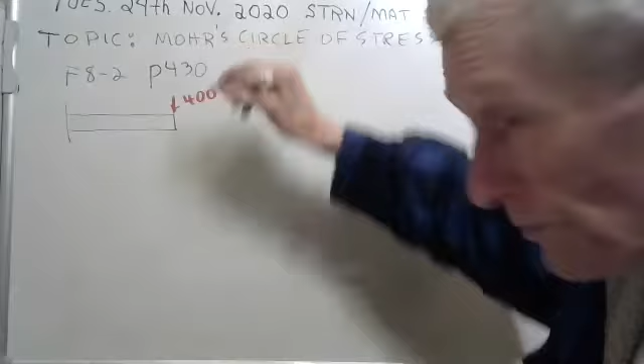I think we started on this the other day, but we ran out of time. And we have a 400 kilonewton force going down here, I'll put that in red. 400 kilonewton force. And they want us to section it right here, section AA, 0.5 meters.

Well, why don't we just look at this section separately? I'll move it over here someplace, and we can look at it. I've removed that section there, and here's your 400 kilonewtons. Can you see that you'll have to have a 400 kilonewtons? Actually, it's a shear force, isn't it, going up, because we know the sum of the forces have to be 0 in this class.

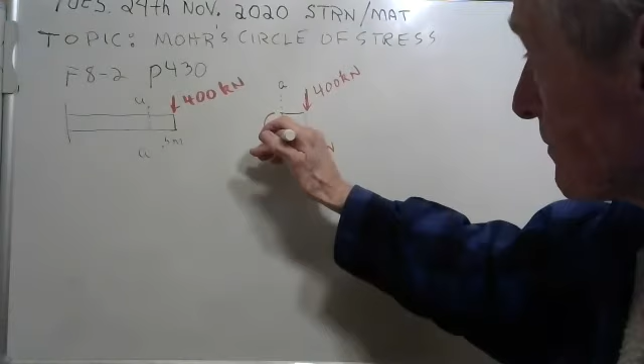But now we've got another problem: this thing will start spinning clockwise, so you've got to have a counterclockwise bending moment. You can figure out what it is. If this distance is 0.5 meters, take 0.5 meters times 400 kilonewtons, and what you'll get is 200 kilonewton meter bending moment, counterclockwise.

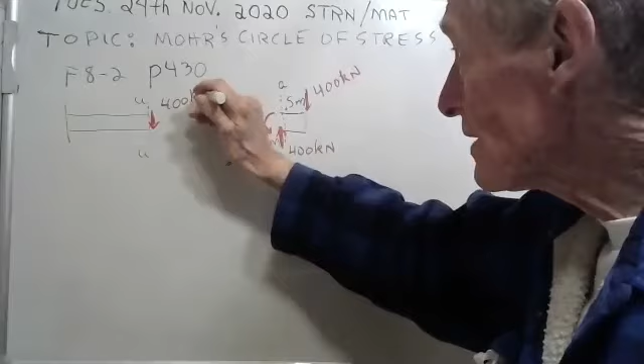But we really like to look at left-hand members. So let's go back over here, and let me erase that and put the forces on section AA on my left-hand member. See that 400 going up on the right-hand member? Well, there has to be a 400 going down on the left-hand member. Newton's third law says so - for every action, there's an equal and opposite reaction.

So you know where that 400 kilonewtons coming from on that right-hand member? It's coming from the left-hand member. And where is this 400 kilonewton shear force on the left-hand member coming from? Well, it's coming from the right-hand member. Equal and opposite.

You see that counterclockwise bending moment on the right-hand member? Well, there's going to be a clockwise bending moment of 200 kilonewton meters on the left-hand member.

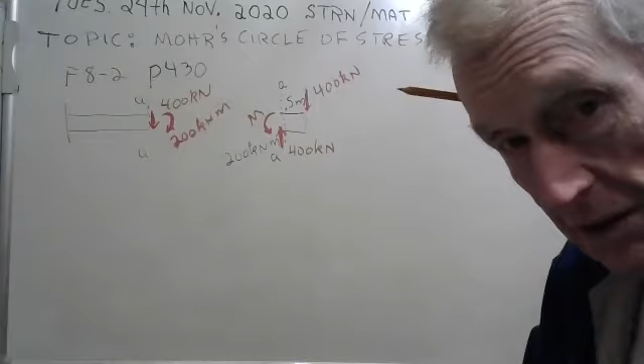Newton's third law. Here I'll demonstrate. I've got my hands here, and I'm going to clap them. Are you ready? Here we go. Ready, get set. Ow, that hurt. Both hands hurt. This hand stings because this hand hit it, and this hand stings because that hand hit it. They're equal and opposite forces, Newton's third law.

I'm sure you knew all that. All right, now let's figure out, they want us to find the stresses.

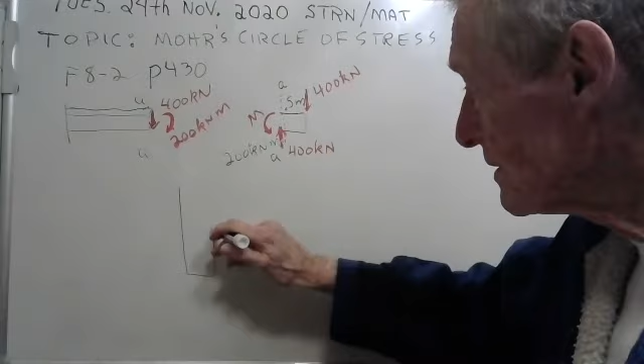Now this is a beam, and it's a rectangular beam. I'll try to draw it here. Not very good at drawing this stuff. There we go, let me draw it larger. They said it's 100 by 300 millimeters. There's 100, 200, that's about right, there's 100, 100, 200, there we go. I could have measured it and been right on the money. See, this is your cross section, I'll draw it there so you can see it.

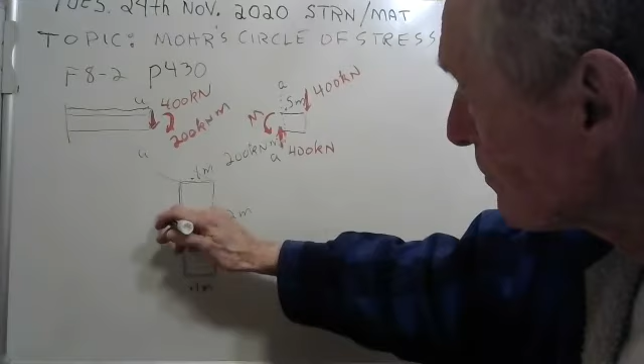They want us to find the stresses right there. This distance is 0.1 meter, 0.1 meter. From here to here is 0.2 meters, 0.1 meter. From here to here is 0.2 meters, and from there to there is 0.1 meter. This is all on page 430.

And they want the stresses right there. They call it position A, point A on the cross section. They want the stresses there. Well, we have the equations, we know how they go. This one goes like this. That's our flexure formula.

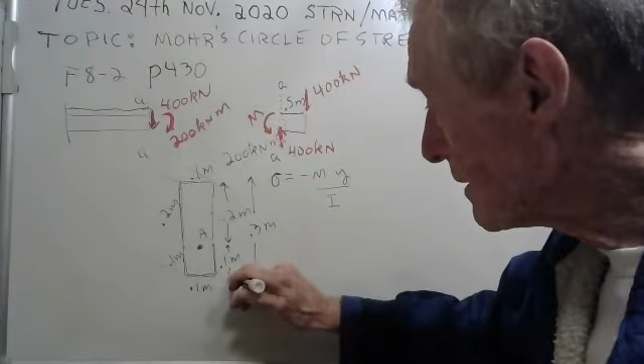Mr. Griffin? Yes. I think instead of that 0.2 meter, it's 0.3 meter. Well, Mohammed, it's 0.2 meters from here to here, but you're right, it's 0.3 meters from the very bottom to the very top. Are you okay now, Mohammed? Yeah, I got it now. 0.1 meter to here, 0.2 meters to there, a total of 0.3 meters. Okay, I got it. Thank you for speaking up, but unfortunately you don't get a thank you point this time. Oh no, I was actually confused, that's why I asked you. Keep trying for those thank you points. Okay, very good.

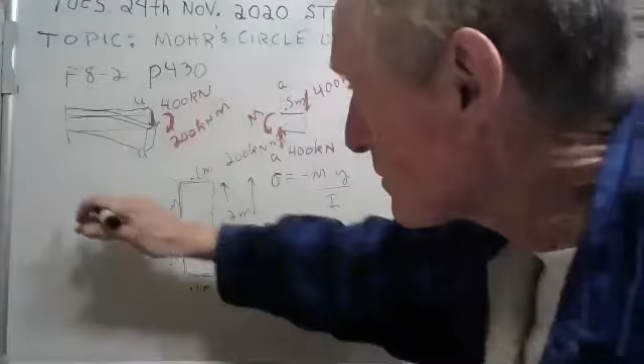Okay, now this is the flexure formula. This is going to turn out to be compression. Now the reason is because of this external force here, this beam bends down. I'll kind of fake it here, but I'm exaggerating. You understand? The beam, it's not going to bend down that much, but it will bend down.

Now, we're used to having beams that bend like that, remember? And the beams we've been studying, again I'm exaggerating, have compression on the top and tension on the bottom. But now this beam here is going to have tension on the top and compression on the bottom. Are you okay with that? So see, everything below the centroid of this beam will be compression. So this normal stress we're talking about, it's going to be going that way, it's going to be pushing. See, compression pushes.

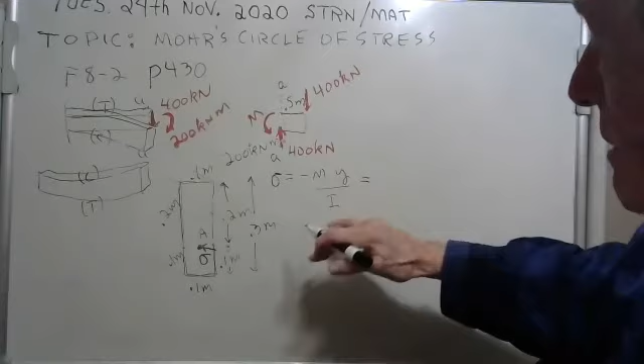Okay, well, here we can get the amount. First, though, I need this moment of inertia. And for a rectangle, we all know what that is. It's 1/12 the base times the height cubed. Okay, go ahead and get that for me, and I'll ask one of you what you got in just a minute.

Okay, I think I got the moment of inertia, but let me ask my students here. We'll pick on Samuel. Unmute and say hello, please. Good morning. What'd you get for this moment of inertia for this rectangular beam here, Samuel? I got 2.25 times 10 to the negative 4 meters to the fourth. Good going, that's what I got.

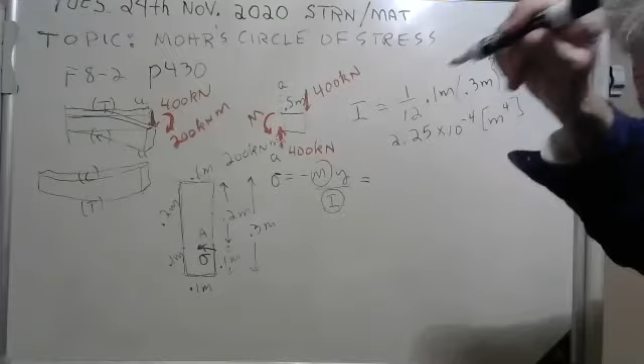Okay, now look at here. We know the moment of inertia, we know the bending moment, it's 200 kilonewton meters. Now, y, that's always the distance from the centroid. Here's the centroid in the middle, right? And that distance there is 0.05.

So here's my numbers. I've got 2.25 times 10 to the minus fourth. I've got 0.05. No, I put that in the wrong place, let me get this right now. I've got 200 kilonewton meters, and this in the denominator is 2.25, 10 to the minus fourth. Yeah, I think that's right.

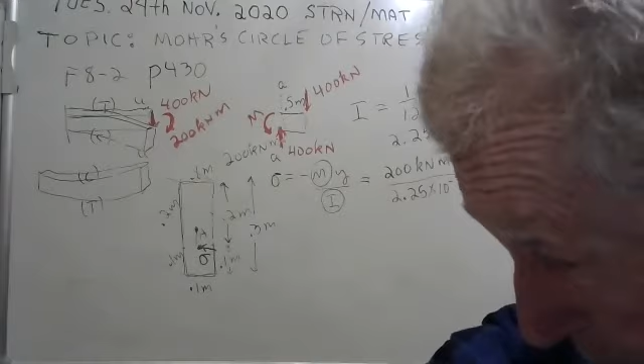Okay, and we know it's compression. See, that's what the minus... well, that minus doesn't work good this time because the y is minus, really, and so you have a minus minus, that makes a plus. But that only applies to these kind of beams like this, that gives you tension on the bottom of the beam. Well, we don't have tension on the bottom, we have compression. So that minus, just don't worry about it, okay? That's for a typical beam, not a cantilever beam.

All right, do that, I'm going to do it, you tell me what you get. Here goes.

Now I got an answer. I got 44.4 megapascals. If you got that, say uh-huh. I need another uh-huh. I got it. I need one more. That's what I got. I think we did good on that.

Now let's get the shear stress. See, I needed to mark the shear on here. We know what the shear is. It's 400 kilonewtons. That's the shear.

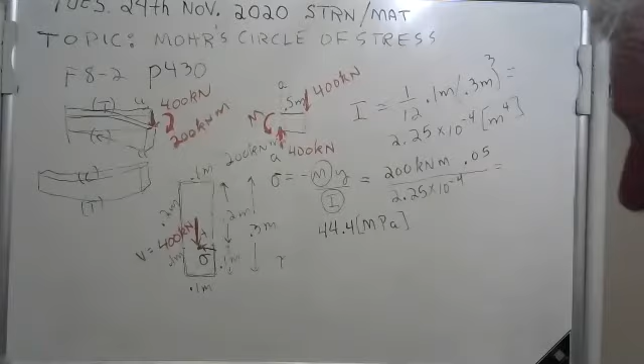Now the bending moment's kind of hard to put on there. The book likes to draw that little squiggle kind of clockwise like that. A lot of times I'll do a bending moment with a double arrowhead like that. But see, the bending moment is 200 kilonewton meters. Okay, but now let's do the shear stress.

Here we go. Shear stress is equal to, now V is that's the 400 kilonewtons. And we got to figure out what the Q thing is. Now I, that's the 2.25 times 10 to the minus 4 meters to the fourth. T, that's just the thickness, it's 0.1 meters.

If we could only figure out this value for Q, we could get the shear stress. Remember, stress is what this class is all about. All right, well, let's see if I can make some room up here. We'll figure what this Q is. Need some room there to do it.

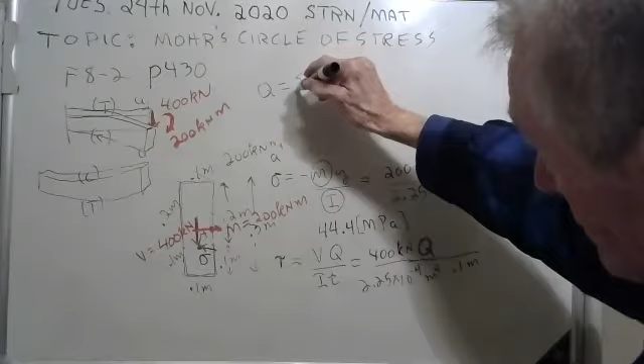Remember what Q is. It's the sum of the YA is what it amounts to. Okay, and there's a method for finding it. What you do is, if you want the shear stress at this location, you draw a line through there. There, I drew a line. And then what you do is you color the stuff above the line.

Now we could do that. Here, I'll color it. I'm going to color all this stuff above the line. I don't know if this shows up on your page there. There we go. I colored all that. And then what you do is you take that area, which is, well, the area is 0.1 times 0.2. But see this Y here, what that is, that's the distance from the centroid of the whole thing, which is right here, to the center of this area, which is right here.

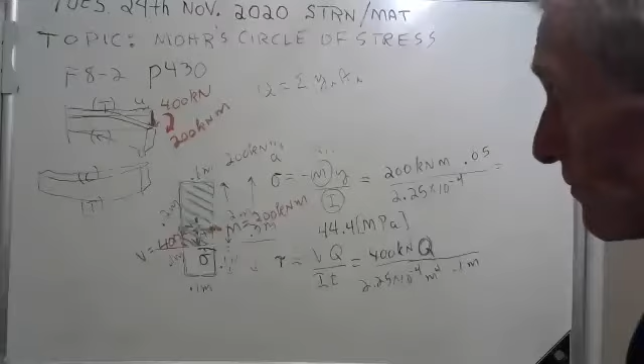Now I'm going to have to think about that. The center of that area, I think it's 0.05. I think this distance that we want here, I'm not sure about it. Now let me think about this now. I want to go from the middle of the whole rectangular area to the middle of this, and yeah, I think it's 0.05. So what we got is 0.05.

Come on now, right, 0.05 times 0.1 times 0.2. Well, I can do that on my calculator. I can't do it in my head though. That's too hard. 0.05 times 0.1 times 0.2. I'm getting 0.001. But maybe that's right. The units would be meters cubed.

But let's check it. Now there's another way to check it. I don't know if I ever told you guys this, but you can color the stuff below the line and it works just as well. Here, let me do that. We're going to color the stuff below the line. Here we go. Ready? I'm coloring everything below the line.

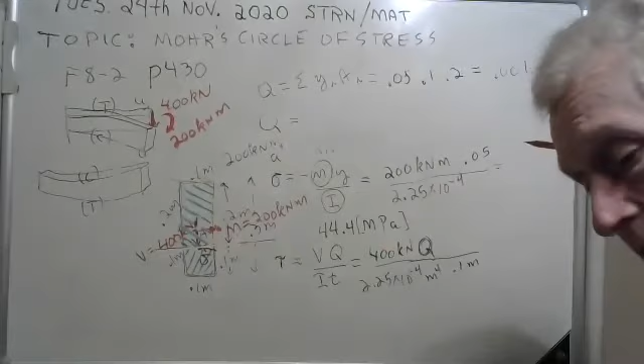And so Q, the first moment of area, it's the same formula, it's just I'm going below the line, is equal to that area times this distance from the center of the whole thing down to the center of that area. It's this distance here. It's getting kind of messy here. But you know what? I think that's 0.1. So what we got is 0.1 times that area, which is 0.1 times 0.1.

And if you do that, boy, I think you come out with the same answer. How about that? It doesn't matter whether you go above the line or below the line. And now look, we got everything we need. We know the shear force is 400. We know Q is 0.001. We got the I, 2.25 times 10 to the minus 4. We got the thickness, 0.1. Hey, we can plug that into it. Go ahead, plug that in and get the shear stress for me.

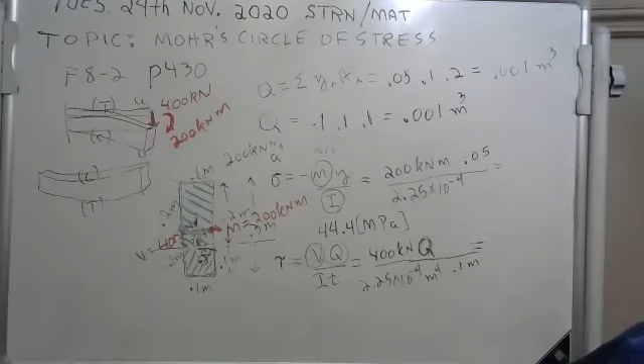On your mark, get set, go.

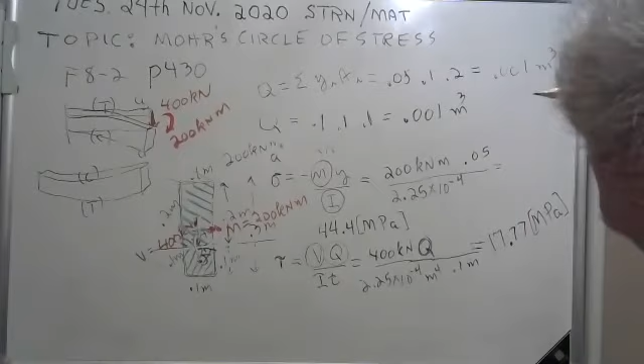Well, I got an answer for the shear stress. I got 17.77 megapascal. Now if you got 17.77 megapascal, say uh-huh. Anybody else? There's two of us. Anybody else? Yeah, I think we got it right. So now we have the shear stress.

Now let's draw the shear stress. Let's draw the stress element. I just need a little room here, we'll make some room. Now what we're doing here, remember we had this beam here, we're making a little teeny tiny shear stress element, they call it. I'll draw it kind of a little bigger here so you can see.

Actually, it's three-dimensional, kind of like a sugar cube. You ever seen sugar cubes? Some people put them in their coffee.

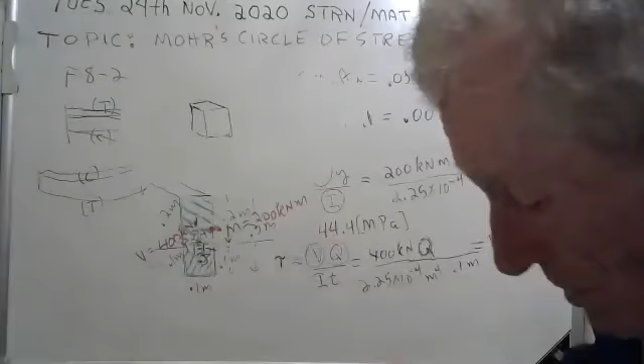But see, we have a normal stress, a compressive normal stress, and we know what it is. It's equal to, oh yeah, it's the 44.4 megapascal, compressive. Of course, now it's pushing on the back of that, you know, sum of the forces are always equal in this class.

And then you have a shear stress going down, and the shear stress is the 17.77 megapascal. A lot of times they'll just draw a kind of a side view of that stress element. They call it planar stress.

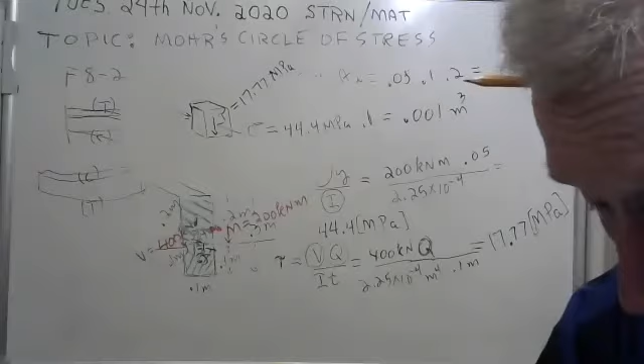Here, let me draw that for you. They'll draw a kind of a side view, and they'll have the normal stress doing this, and then the shear stress on this particular one is doing that. Now I didn't draw... yeah I did, I drew that on the backside. See, they kind of turned this around, you understand?

It was like this, and we just... no, I'm no good with 3 dimensions, I'm not explaining this very good. But you can see it's got compression, normal stress. I think you understand that okay. Come on. But see, you have some shear stress.

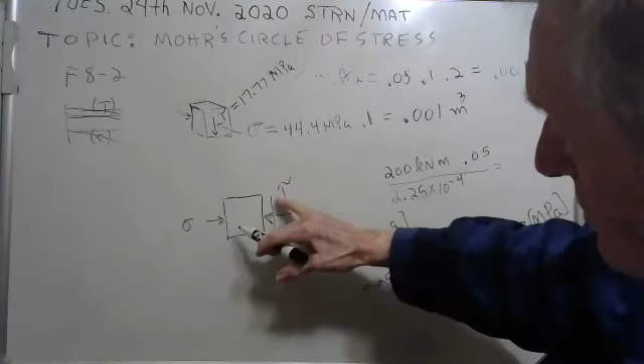Well, now we got a problem here. You can't just have this one force going down, so you got to have a force going up, a shear stress going up. Well, now it's going to spin clockwise. To keep it from spinning clockwise, these are all the same shear stress, okay?

So there's your... I think what you're doing is you're looking at it from over here. Here we'll put our observer right here. Here's our observer, and he's looking at this, give him a sort of a crew cut here. Yes, see, here's our observer. He's looking at that stress element, and this is what he sees.

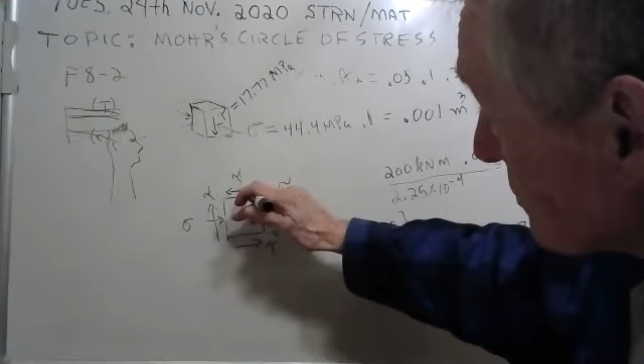Now, there is no normal stress in the vertical, but there could be. You could have a normal stress, a compressive normal stress doing that. That's possible, or it could be tensile. If it's a tensile normal stress, then tension pulls, compression pushes. But in general, you could have a stress element that looked like that. They call this a stress element.

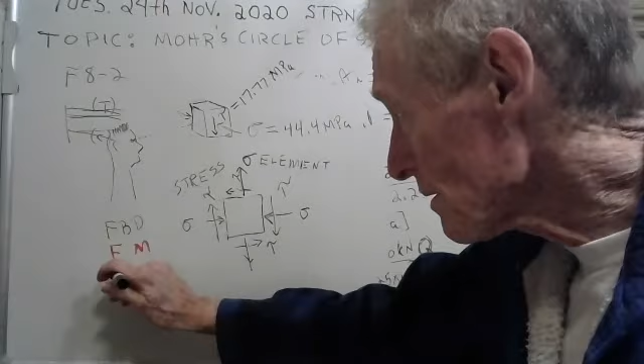Now, how do we get it? We started with the free body diagram, and we solved for all the red stuff on it. We solved for forces and moments on the free body diagram. And then we used our equations. What was it? The flexure formula, and in this case we used the flexure formula and the shear formula. And we found the normal stress and the shear stress.

Yeah, you can see that, maybe. There's sort of a procedure that we follow. You draw the free body diagram, you solve for all of the missing forces and moments, put a little comma there for the English instructors, and then you use your formulas. Now, it might be you're going to have to use some other formulas. We've discovered there's also pressure vessels. If you had a pressure vessel, you can have stress because of the pressure vessel.

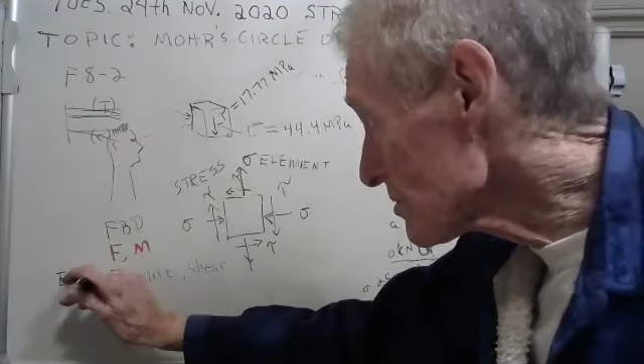We've gone through a lot of different equations, and you use your equations. See, these are the equations you use, and you find the stresses. And then the last step, do I have room? Yeah, is you make a stress element. See our stress element? That's our stress element.

You follow this step-by-step plan, and you've done it. I know you've done all of these steps here. It's just maybe we haven't majored on doing the stress element. But that's what we're going to talk about today. And we're going to show you the circle of stress, which is an interesting way of finding the maximum stresses in your piece.

Do we have any questions on anything at all? Go ahead, I'm listening. Okay.

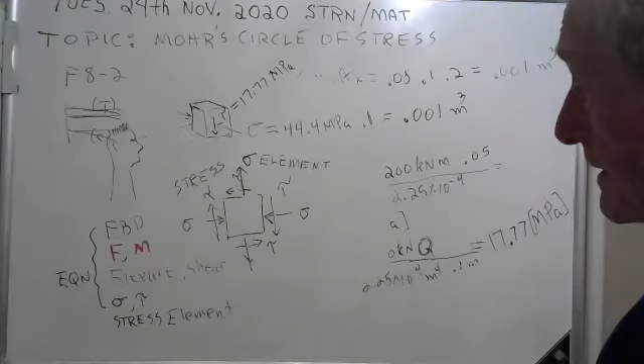Let's look and see how we did. Go to the back and then let's look at fundamental problem 8.2. I'm looking it up now. Fundamental problem 8.2. They go through all of this stuff, and when they get through, they draw the stress element. And here's what the book has. The book says your stress element looks like this.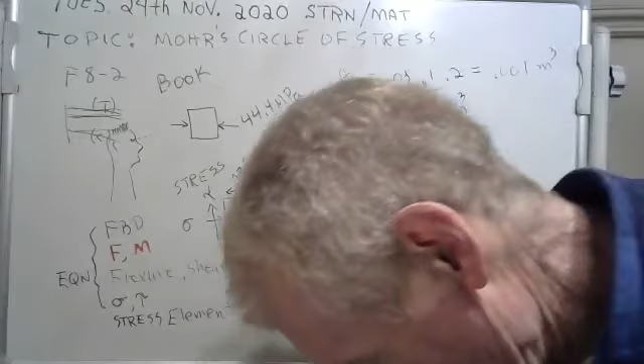Hey, you know what? That's what we got. That's the same thing, they rounded off. We got 17.77.

But yeah, hey, we did a good job, didn't we? Any questions on what we've done so far?

All right, well, turn to page 450. We're going to be on page 450. Page 450.

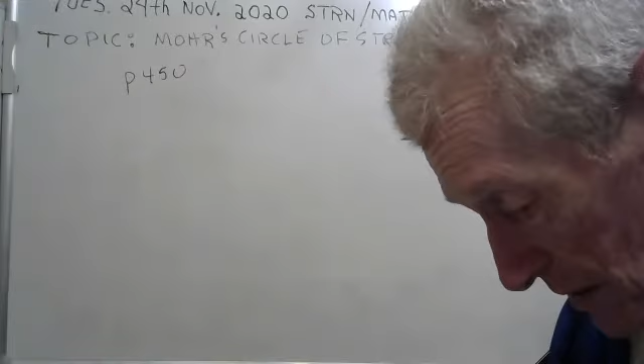And they've got a stress element there. Now on theirs, they have some tensile stress in the y direction, they call it sigma y. And they have some tensile stress in the x direction, they call it sigma x. This is sort of a general case, what you might encounter at the end of solving all those equations. And they have a shear stress acting on your stress element, and they call that tau xy.

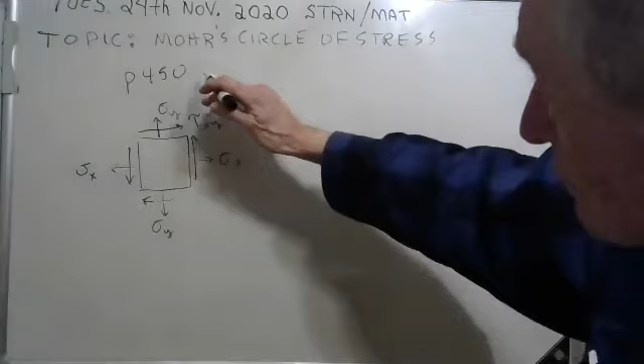Now what they're doing on these two pages here, page 450, page 451, is they want to find the maximum stress in your piece. And what they're doing is they're looking at different angles. What if you looked inside the piece, rotated a tiny angle here, and looked at a stress element at an angle inside your piece?

You see, we rotated it. We rotated that an angle - what do they call the angle? Theta, okay, there you go. We rotated it, and if you did that, there'd probably be stresses on that rotated stress element.

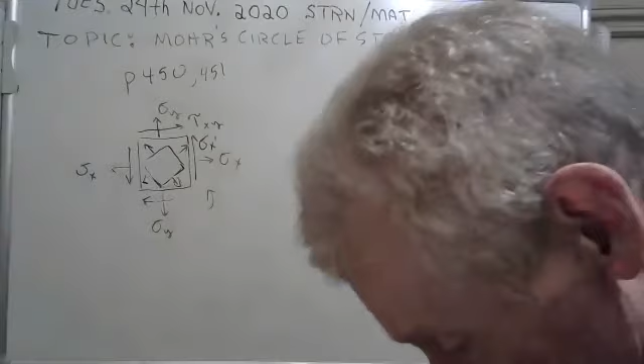And what they did was they put normal stresses, and they called that sigma x prime, and they call this one here sigma y prime. Well, I don't see that they wrote that, but that's what they call it. And then you could very well have some shear stresses in here, and they call that tau x prime y prime.

And they did a calculation. It's clever the way they did that. You could follow through their derivation, and I would love to have time to do that with you.

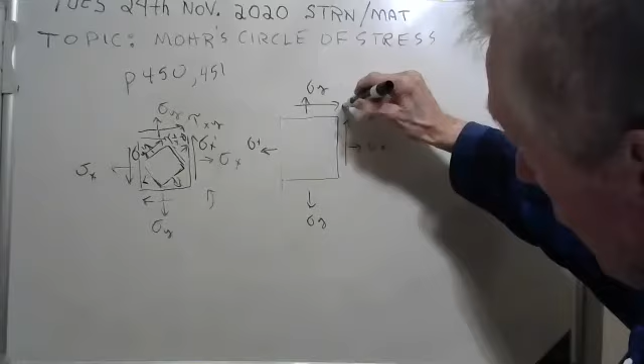See, what they did was this. If you had a stress element, and you knew what all these stresses were, this sigma x and so forth, and sigma y, sigma x, sigma y. And you know, if you knew what all these shear stresses were, tau, x, y, etc.

What they did was they looked at a piece like that. Actually, it's a three-dimensional piece, because remember, this thing is really like a sugar cube. It's got 3 dimensions. It's got 3 dimensions, so it kind of goes like that. They're looking at this kind of a wedge-shaped thing.

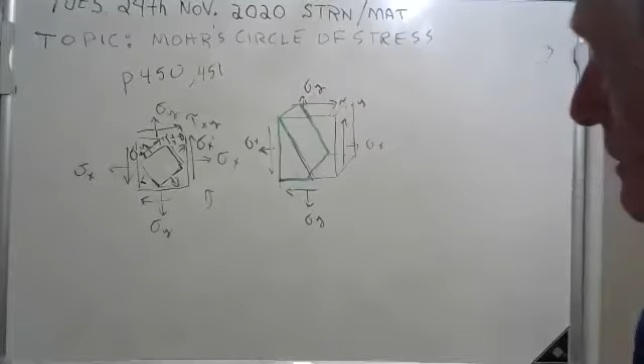Here, I'll try to color that wedge-shaped thing for you. There's a picture of it on page 451, only they didn't make it 3D like I'm trying to do. Can you visualize a kind of a wedge-shaped solid like that?

Now, sum of the forces on that wedge - I'm saying the word wedge, kind of like a doorstop. You know, doorstops kind of look like that, don't they?

The sum of the forces have to be zero. Now, you can figure the force on this back face. See, force is equal to stress times area. So you can figure the force on that back face going that way. You can figure the force going down on this one - it's just the stress times the area of this bottom.

Here, I'll try to draw you what the bottom looks like. Some hidden lines there. That bottom has an area, and if you multiply it by the stress, you can get the force going down. And also there's shear stress - there's a shear stress going down on this back face, and if you multiply it by the area, you'll get a force going down. And you see this shear stress going to the left. If you multiply the shear stress times that area of that bottom, you will get a force going to the left.

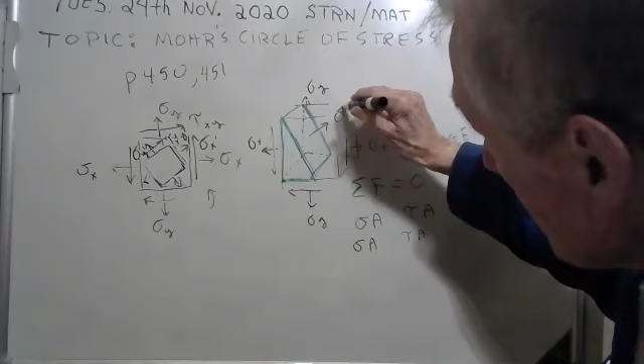Well, the sum of all these forces has to be zero. And so they break it into X and Y components, and they come up with the shear, the normal stress in the X prime direction. And they come up with the shear stress in the X prime, Y prime direction.

They go through all of these trigonometric sine and cosine calculations there, which I'm not going to do because we don't have enough time. And here's the result - we have a result. The result is called the stress transformation equations. They're on page 451, and they go like this.

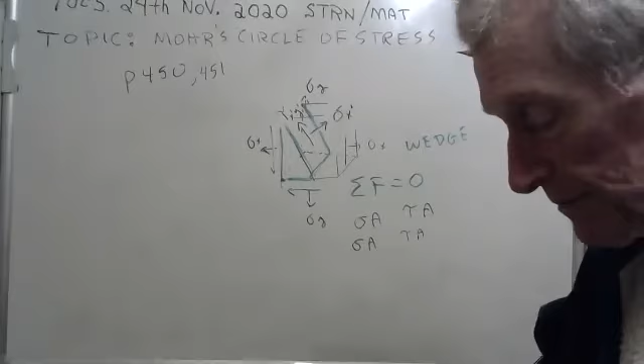Come on now. Let me try a different one, maybe a different one will work better. I don't know, let's try that. This blue one sometimes works good. Okay, so these are called the stress transformation equations.

The stress, and here they are. I skipped the derivation because I was too lazy to, well, we don't have enough time for one thing. The stress in that rotated element, when you're looking inside the piece, is equal to...

I'm going to have to sacrifice some space here, but you can read it. It's in your book.

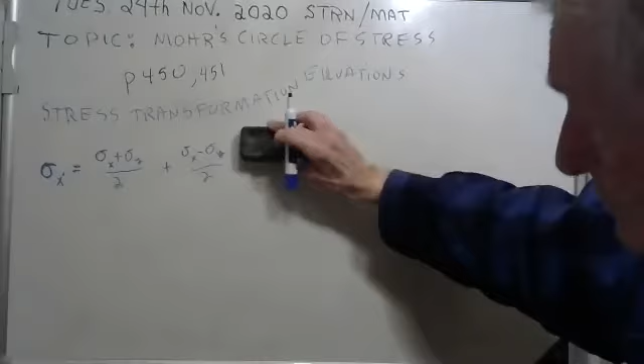Remember, we rotated at an angle theta. Well, when you do the derivation, it comes out 2 theta in the derivation. There's the formula for the normal stress at a rotational angle of theta.

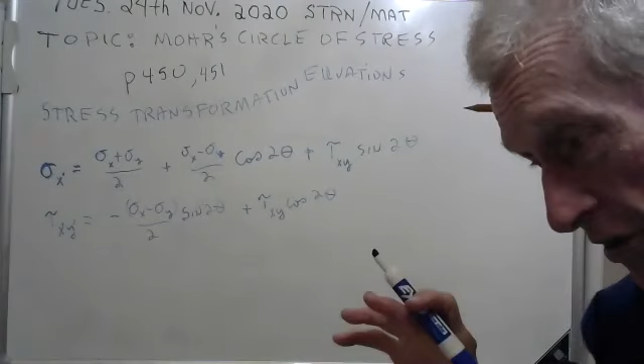And they also have an equation for the shear stress when you rotate the angle. And there's your formula for your shear stress. Your transformed shear stress, looking at it from a different rotated angle, theta. I hope that shows up on your screen there.

They're called the stress transformation equations. And we could do, let's do an example. Here, we'll do an example. Let me find one that I like here. Okay, here's one I think will be all right.

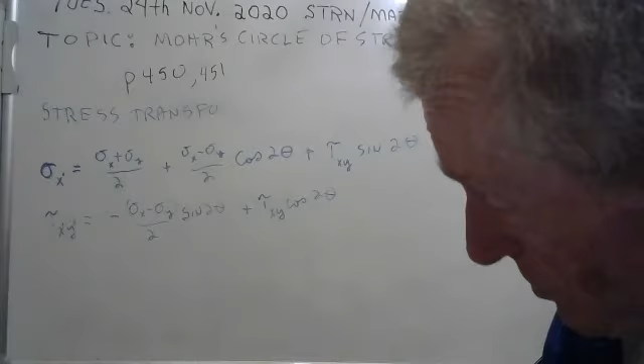Let's suppose you had a stress element. After you've done all the work that we've learned in this class—your free body diagram, your equations, your stress element—you come out with a stress element that looks like this.

Ooh, hey, that's writing pretty good. And this is your Y, your normal stress in the Y, and that one's compressive, isn't it? Of 2, we could say they're KSI, I suppose.

And so you'd have to have, going that way, the same amount—let's say this is 6 KSI. Of course, you'd have to have 6 doing that. And let's say this is the shear stress, 3 KSI.

Okay, great. Well, then it's just a matter of picking an angle and trying it out. If you rotated this... I'm going to rotate this.

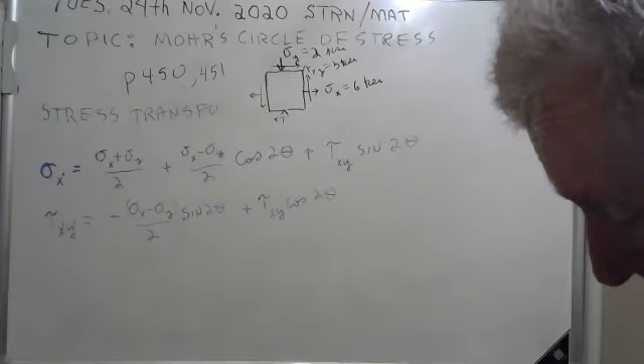I'm going to rotate this an angle of 18.435 degrees. Now there's a reason for that, because I figured out that's where you get your maximum normal stress. We'll just do the normal stress right now, never mind the shear stress. But see, 2 theta turns out to be 36.87. See, there's method in my madness.

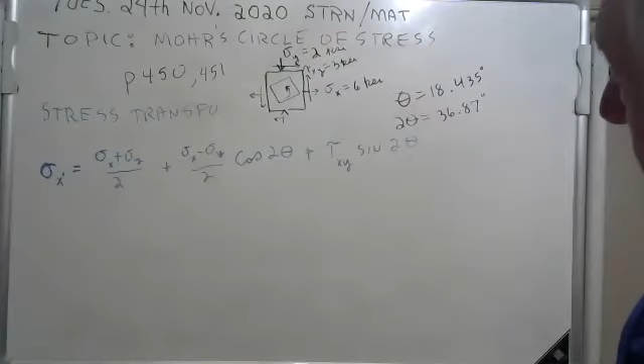And so we're going to plug this in. And it turns out that if you rotated this 18 degrees, which would be about like—it's not that big a rotation. You see that the amount that we rotated it counterclockwise is about 18 something degrees, and it turns out that that's where you have your maximum normal stress.

Now I'll show you, here we go. We're going to find the normal stress at that rotation, and it's going to be—well, we know what these are. This is 6. Now wait a minute though, this is not plus 2, it's a minus 2.

It's 6 plus a minus 2 over 2, plus 6 minus a minus 2 over 2, cosine of 36.87 when you double it, plus 3 sine of 36.87.

I want everybody to plug that into their calculators into this stress transformation equation, and we're going to get the stress. What we're going to get is this normal stress on the rotated element. Go for it, you can do it.

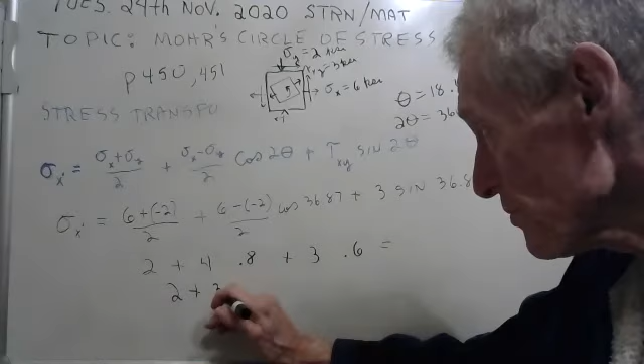6.6. Nope. Here, I'll write it better for you: 2 plus 3.2 plus 1.8. Put that in your calculator and try it again.

Hey, I like it, it's 7. Now did anybody else that got 7 say uh-huh? Mm-hmm, yeah, there's one. Yeah, there's one.

Interesting. We have just discovered that there's an internal normal stress at a different angle. It's equal to 7 KSI. Well, you know what? That's bigger than 6, isn't it?

What we're after here is the maximum stress. You might think, looking at this thing, that the maximum normal stress is 6. That's tensile, this is 2, that's compressive, but I don't see any 7 on there. But it turns out that the maximum normal stress is 7.

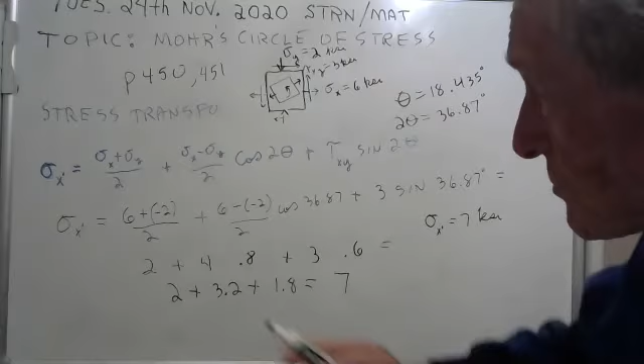Interesting. We could also do the same thing with the stress transformation equation, not the shear stress one. But you get the point. If you're after the maximum stress, it might occur at a different orientation. See, this is a different orientation. This has been rotated 18 something degrees, and it's got more stress on it.

Now, if you take those two equations and do some algebra, which they do, I'm gonna skip that and get right to Mohr's circle because it's gonna be fun for you. You'll love it.

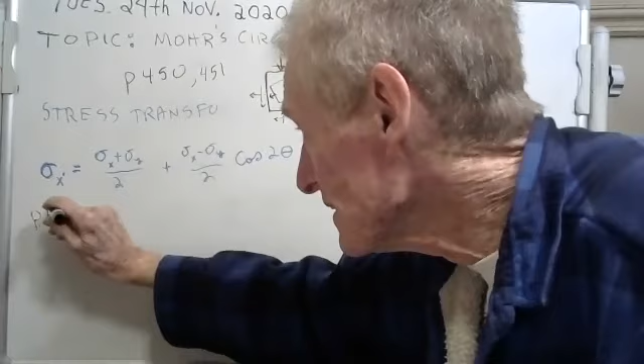But I'm gonna show you where this is in your book, on page 469. Can you read my writing? I hope you can. They have the shear stress equation. I erased it a little while ago, but it goes like this. Now what happened to it? Oh no, I lost it. Okay, let me find it again here. There it is.

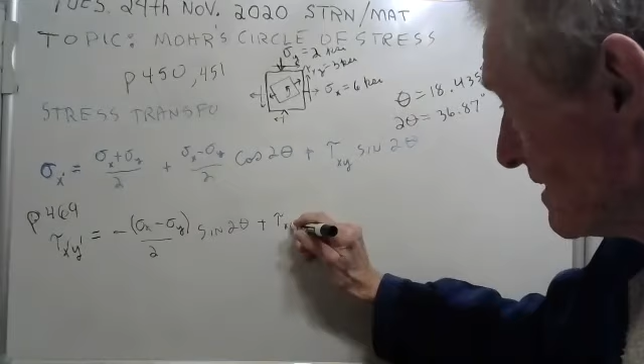Now I hinted to you guys where they got these equations. They solved for the sum of the forces equal to 0 on your stress element, and they got these equations. I told you the page, you could read it for yourself.

And then a guy named Mohr came along, and he did some algebra on these equations. What he did was he squared both sides of the equation. He squared them and he added them together.

Well, actually what he did was he moved this term over here on the left-hand side. He made this a minus and put the equal sign here. And then he squared that, he squared this, he squared that, he squared this, and he added them together. And when he got through, what he had was this here.

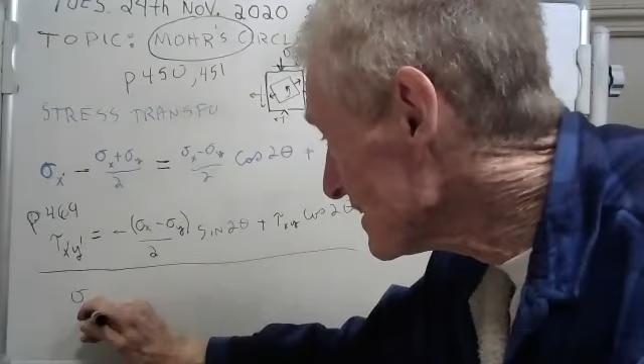Remember, he squared that. And then he added this. And then he squared all of this, and he squared all of that. And he added them together.

Now the marvelous thing that happens is that whenever you have in algebra the sum of two things and you square it, you all know you get a squared plus 2ab plus b squared. Remember that from when you were all younger and better looking? Well, we have the sum of two things here and the sum of two things there, and when you square them, you get these middle terms. Well, these middle terms drop out. It's amazing, they go bye-bye. And all you're left with is the square of this term plus the square of that term.

You know what, that's got a cosine of 2 theta squared plus sine squared of 2 theta. Does anybody know what sine squared plus cosine squared is equal to? It's equal to 1. How interesting.

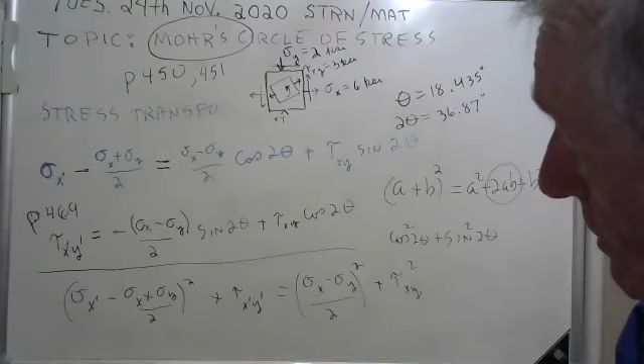Now that may not look important to you guys, but that's the difference between geniuses like Mohr and the rest of us. He looked at this and he said, hey, you know what, that's the equation for a circle.

Let me refresh your memory from when we were much younger and better looking. An equation of a circle that you learned in school. Does that ring any bells? Isn't that the equation of a circle? Let me call on somebody here.

Brian, unmute and say hi. Hello. Hey Brian, do you remember, probably from high school, that's the equation of a circle? Yes sir, you actually remember. You're not just saying that to make me happy. You actually remember it. Yeah. Good for you, Brian.

Well, see, here's your X, here's your Y, and here's your R. There's your R, and that's the equation of a circle. Now, this is the equation of a circle, only they've moved the circle over.

It's not centered, because they have an X minus some distance, I don't know, call it A, that'll work. Come on now. Yeah, there you go. And see what that is, it's a circle that's been moved over a distance A. But it's still got a radius R. This is still X, this is still Y, but it's not centered.

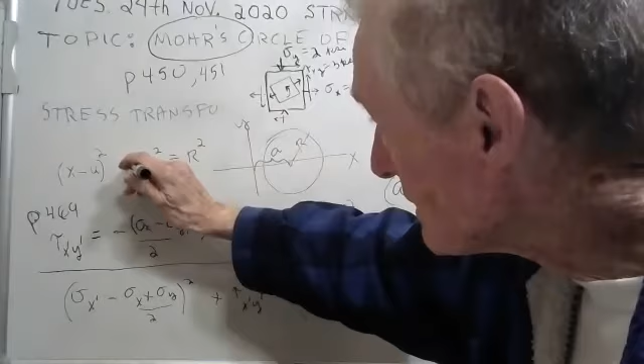It's not centered. Can you read my writing? Dang, these dang pens. See, they scooted it over like that. That's what we got here. But the center has been scooted over, and you see this whole thing right here? You know what this is? That's equal to the radius squared.

Well, it's quite an accomplishment he made. And now I'm going to show you how to do the Mohr's circle. Need some room though, I'm going to have to erase some stuff so that we can show you this.

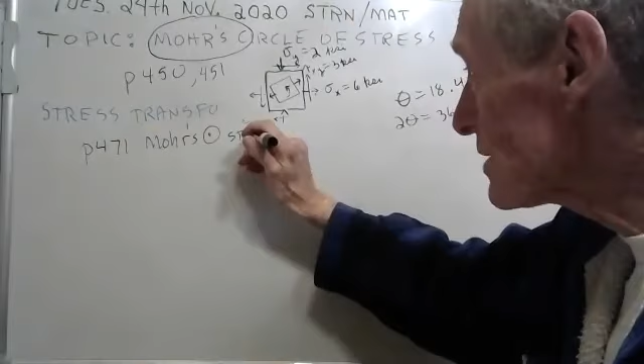Okay, now here's how you do Mohr's circle. They have a step-by-step plan for doing it on page 471 - Mohr's circle step by step. It's like a recipe, like a recipe for making bran muffins. You put the egg in, then the milk, then a little oil, and you stir it, preheat the oven. It's just a recipe.

Here's what you have to do. You have to make your normal stress and shear stress axis. Let me do that. Okay, now this is going to be the normal stress axis. And this is going to be the shear stress axis. It's kind of weird on this Mohr's circle, but the shear stress axis goes down, and the normal stress axis goes to the right.

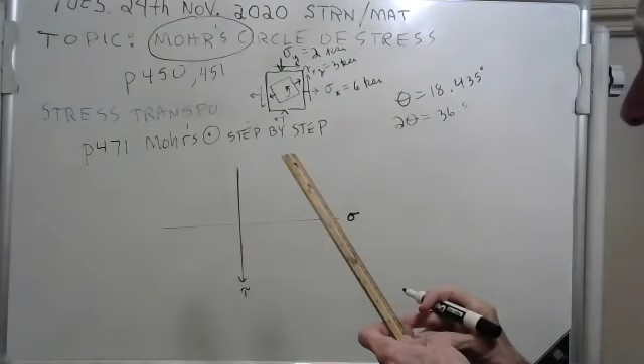And what you do is, you see that 6 there? We got to measure 6. I'm going to use inches - inches will be fine. Come over here, 6. I want 6 inches. And then you see that 3 KSI going up - well, going down is plus, so we got to go down 3.

In order to understand that, I would have to derive it.

This is your anchor point - I'll call it point A, A for anchor. You know, they have anchors on ships, right? They throw the anchor off, and that's where the ship stays. That's a pretty important thing, a big old heavy anchor. That's your anchor point.

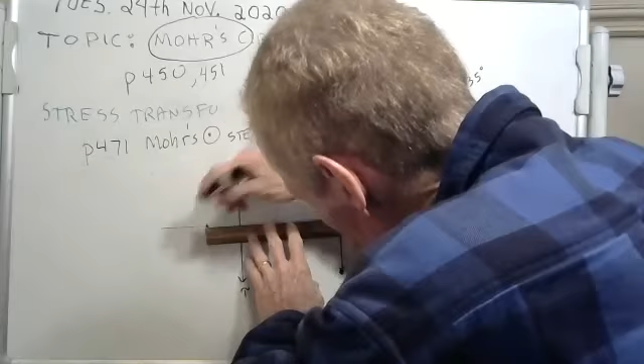Now let's look at this 2. Well, that's compression, and compression is negative. So going to the right is plus, going to the left is negative. So we're going to go to the left 2. Now, if you went down 3 on this one, you have to go up 3 on this one. These directions are all in your book, on page 471, the recipe for Mohr's circle.

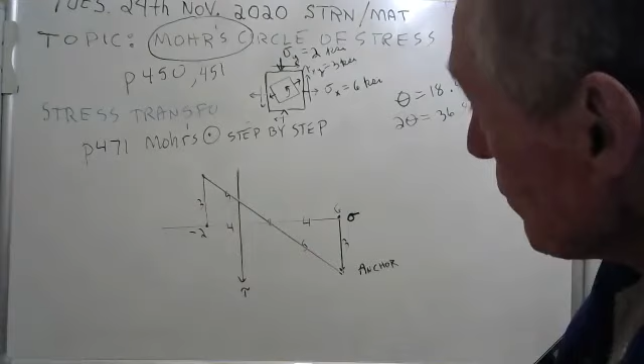Then you connect the dots. Here we go, I'm going to connect these dots. We have just found the diameter of our Mohr's circle. Do you remember this was at 6 and this was at -2? That makes 8, so that makes this 4, and this 4. This is 3, and this is 3. This is 5, and this is 5. We have a circle of radius 5.

So here, let me draw it for you. I'll put some marks here at 5 so I can try to draw a nice circle. It's got a radius of 5. Now, I want you to be making some more circles for me for homework. I gave you some problems, it's in content. Now here we go, I'm going to draw these for you.

Here goes. We are drawing the Mohr's circle now. Ta-da! We have just drawn the Mohr's circle, and we can find the normal and shear stress at any orientation whatsoever.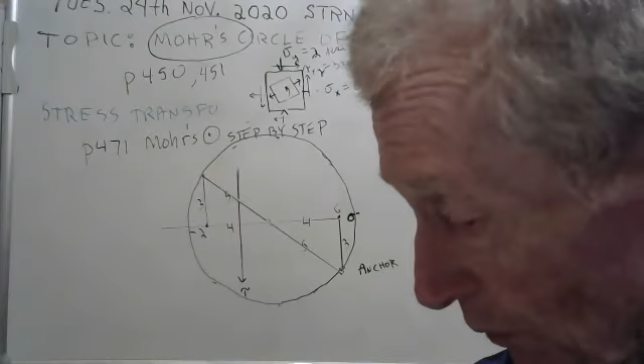But what we're interested in most is the maximum. Now, the maximum occurs right here - that's your maximum normal stress, and we can figure out what it is. Because if this is 6 and this is 4, then that means that's 2. The center's at 2, and if the radius is 5, that means this is at 7 KSI. Guess what? That's your maximum normal stress.

Now, all angles are measured from the anchor point, and angles are always measured positively counterclockwise. But you got to understand, this is 2 theta. Since this is a 3, 4, 5 triangle, that means 2 theta is 36.87 degrees. You memorized the 3, 4, 5 triangle - I told you that a long time ago. And so theta is half of that, which is 18.435 degrees. At that orientation, where you rotate it, you get your maximum normal stress of 7 KSI.

Now the maximum shear stress is down here - that's your maximum shear stress. We could figure that out from the stress transformation equations, or you can just get it from Mohr's circle. It's just equal to 5, that's the radius - 5 KSI. We should plug that in and show you. Let me find the shear stress equation, and we'll plug it in and show you.

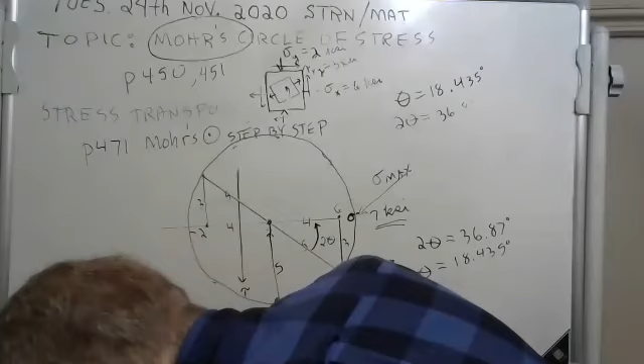I keep losing these equations. Let me dig around here and find them. Here they are.

Okay, your shear stress in the rotated stress element is...

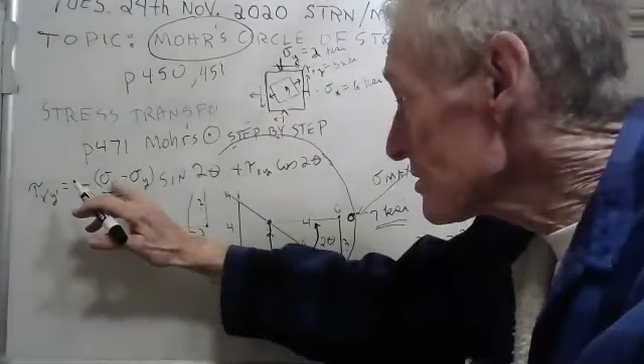Now we're going to plug in our numbers. We know sigma x is 6, and we know sigma y is -2. So it's 6 minus a -2, which makes 8. Over 2 is 4, so you got -4 sine of 36.87.

Hey, can I help you? Hey, bud, I was telling you, Brad—oh, give me a hug. Give me a hug. There should be a package for you today. I hope so. Now, where are you going? At Hannah's house. Oh, yeah. If there's a package, will you bring it in? Yeah, sure. No, I'm going to leave it out. In fact, I might kick it out in the street. It might come during your class. Yeah, okay. Hey, bye-bye. Bye-bye.

Now, let's see, where were we? I got lost here. Oh, yeah, plus 3.

See, the shear stress is 3. I need a little room here, though. Gosh, I'm running out of room. We'll just make room. Plus 3 times the cosine of...

36.87. Okay, now I want you to put this into your calculator. I know you can do this. Did I get the right equation? Yeah, I think that's right. Okay, plug that in and see what you get. Go ahead, I'm going to do it.

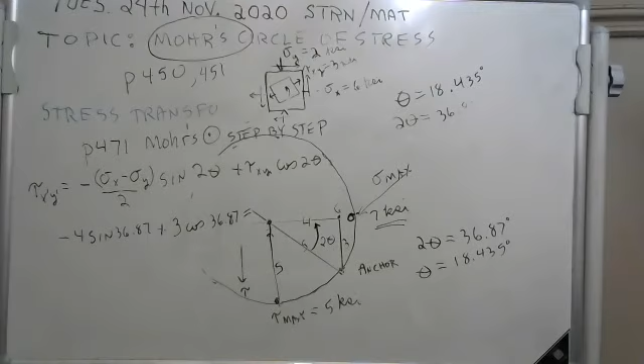Oh, no, wait a minute, wait a minute. I goofed up. You get 0 when you plug that in, because to get down here, you've got to go this way. This angle, all angles are measured from the anchor point, guys. So this angle is not 36.87, it's minus 53.13. My mistake. Minus 53. All angles are measured from here at the anchor point. Going clockwise is negative, and that angle, the 2 theta there, is equal to 53.13.

Now you plug that in, please, and see what you get. I goofed up. Okay, here goes.

Well, I got an answer. I got 5. How about you guys? Well, that is the answer. It's 5, so Mohr circle worked. Did anybody else get 5? If you got 5, say uh-huh. Mm-hmm, yeah, there you go. Uh-huh. We might have time for...

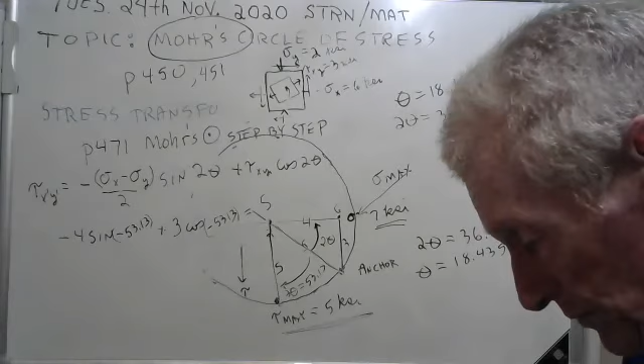One more if we hurry. But that was a lot of fun. Now you're going to be doing some of these, so maybe we better try another one so we can feel good about it. Okay, I'm going to erase all this unless you have a comment or question. All right.

The topic today is Mohr circle, it's in chapter 9. And we're going to do another one now. Here's your stress element. Now to get this, remember, you got to jump through a whole bunch of hoops to get this.

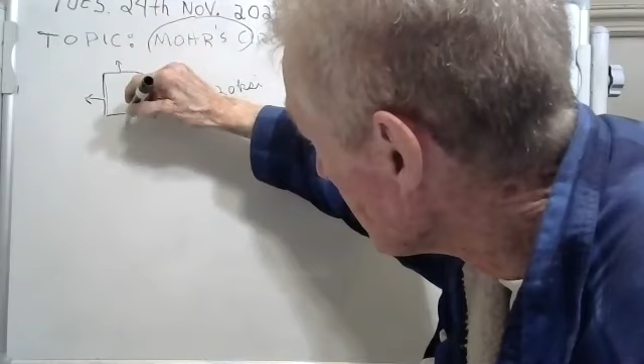See, you know what that is? That's your normal stress in the x direction. And then the shear—you know what that is? That's your normal stress in the y direction. And then your shear stress is 6.

Let's say after all the work that you went through, you came up with a stress element like that. See, this is 4 KSI. Hope you can read my writing. There we go. Shear stress is 6. Normal stress is 20 in the x direction.

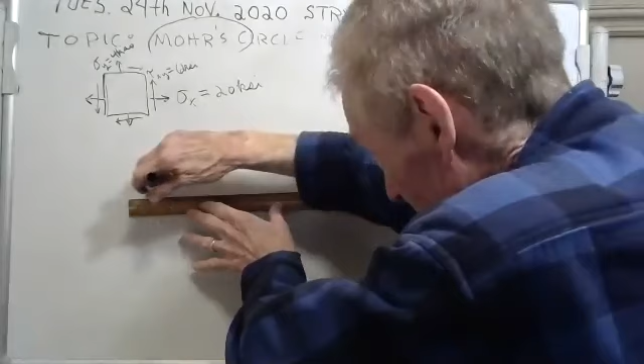Now we're going to do the Mohr circle, and I can tell you what the maximum stress would be on this stress element. So first, remember the rules. Follow the step-by-step foolproof plan on whatever page I told you guys. And then make your normal stress, shear stress diagram. Okay.

Okay, now see that 20? You come over here, 20. Uh-oh, I can't go 20 inches, that'd run off the board there. I could use 20 centimeters, though, that might work. Let's do that. That puts me right here.

There. Now this is at 20 KSI. Now this here is 4, but that's tension, so you don't go compression, you don't go negative, you go 4. I'm using centimeters, so let me do that. There we go, this is at 4.

Now remember, according to the directions, if you go over 20 and that goes up 6, you got to go down 6. So let me go down 6. Here we go, there's 6.

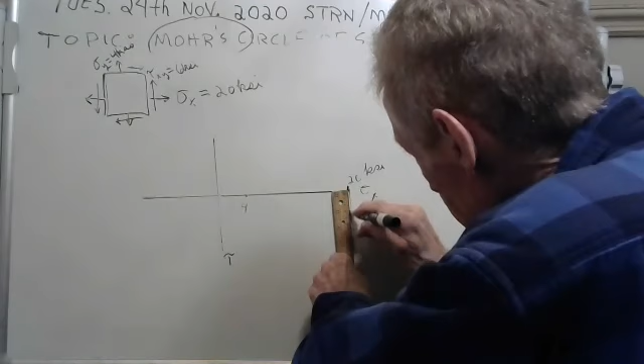Now you realize you can get all of this information from those stress transformation equations, but this is pretty neat—you can get them from Mohr circle too. Now if that's 6 and you went down 6 here, then you go up 6 here. So I'm going up 6. Here we go.

Ta-da. And this is your anchor point right here. That's your anchor point, hope you can read my writing. Now we're going to connect these and we'll have our diameter of our Mohr circle. Here goes.

Oh, gee, it doesn't. These pins, I'm not happy. That's a little better.

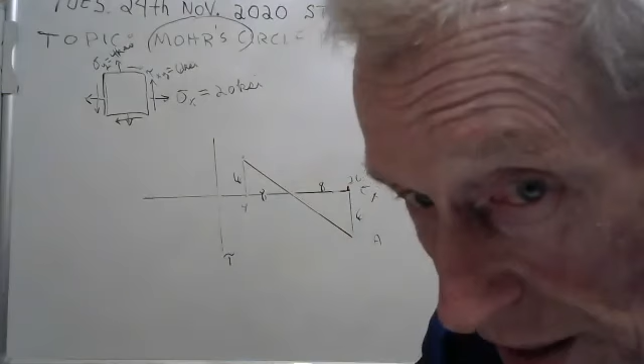See, that's the diameter of your Mohr circle. Now, if that's 20 and that's 4, that's a difference of 16. Well, this should be 16, is it? Yeah, pretty close. So that means this is 8, this is 8, this is 6, that's 6. You know what? We have another 3, 4, 5 triangle, guys, only it's a 6, 8, 10. See, if you have a 4, 3, 5 triangle and you double it, you get an 8, 6, 10.

I want you to be able to recognize 3, 4, 5 triangles. Okay, and so that doesn't look like 10. That's more like an 11 and a half. I must have done something wrong. Now, just a minute here. Oh, that's my problem. It's more like that. The 20 should be right there. Oh, well, I think I'm a half a centimeter off, but you get the idea.

Now, oh gosh, I have 1 minute left. Here, let me just draw this Mohr circle and we'll find the maximum stress and we'll have to adjourn. But it's been fun.

Can you see that this is going to be the maximum stress right there? And I can tell you what it is. Now, let me think. If this is 20 and that's 8, that makes this 12. See, 4 and 8 make 12, yeah. And if the radius is 10, and that's 12, you know what? The maximum normal stress is 22 KSI. It's not 20, it's 22.

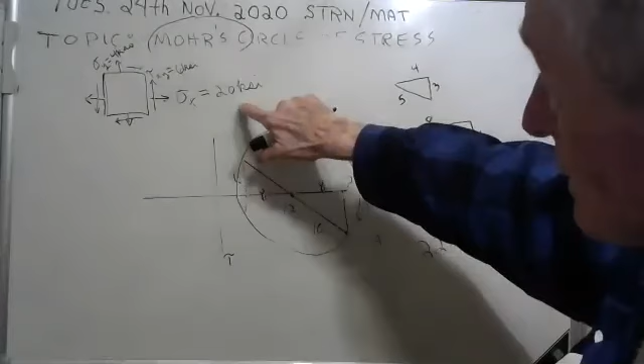And I can tell you the angle it happens at. All angles measure from here. The 2 theta is equal to 36.87. And so the theta is that 18 something that I can't remember. 18.4 something.

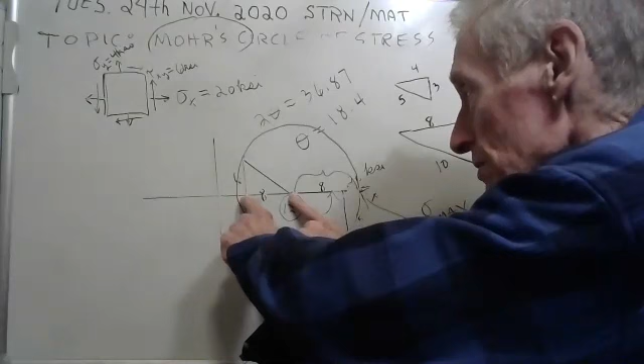Oh, thanks for asking. If this is 12 and this radius is 10, 10 plus 12 is 22. See, the radius is 10. You've got an 8, 6, 10 triangle, it's double of 3, 4, 5. And so if you take 10 and add it to the 12, you get 22. Did that make sense? I guess, yes. See, this has got to be 12 because going to here is 4, and that's 8. 8 and 4 is 12. Okay, going to here is 20. 20 minus 8 is 12.